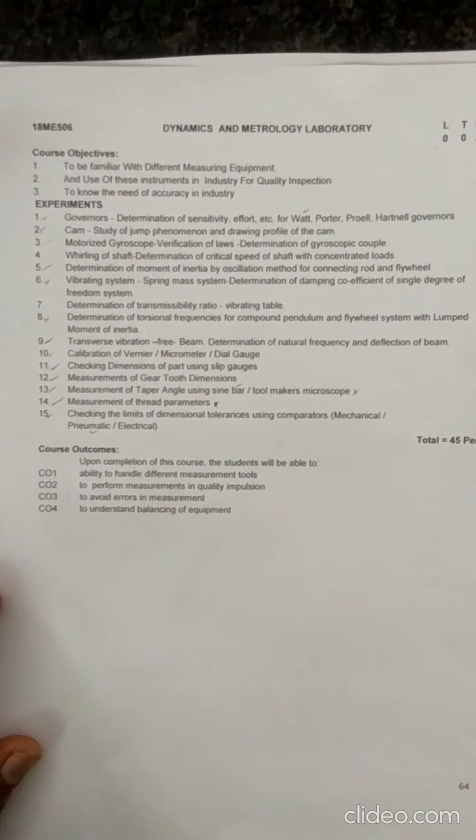18ME 506 Dynamics and Metrology Laboratory. Today I am going to discuss the exercises of the metrology lab, starting from the 11th exercise, checking dimension of parts using slip gauge.

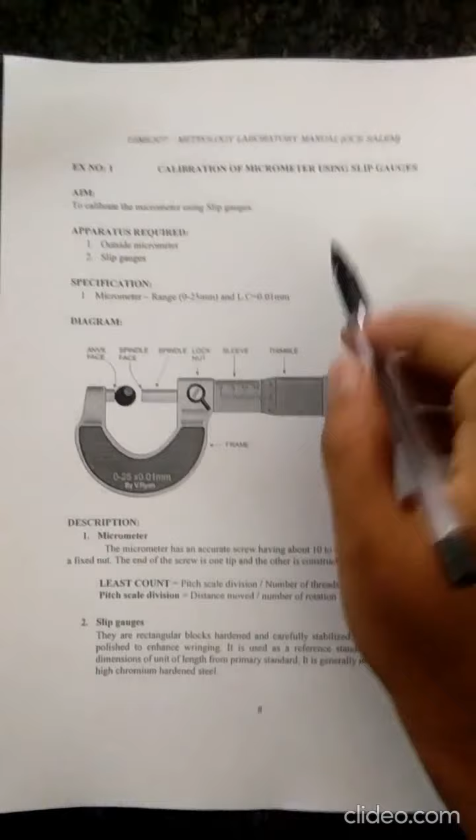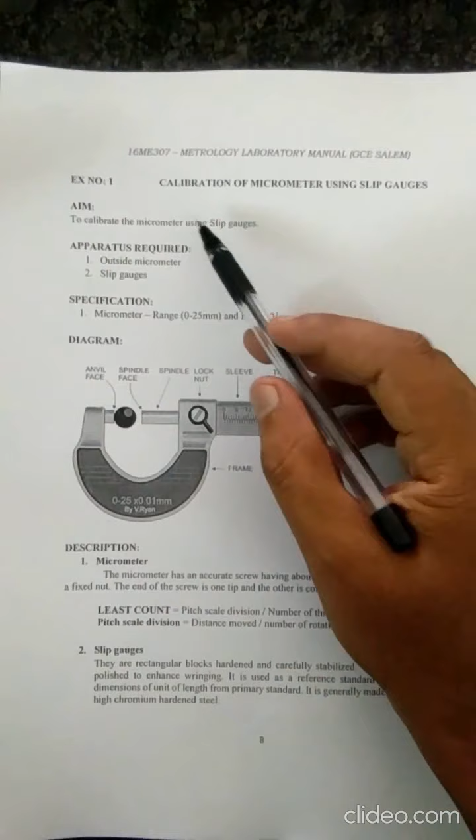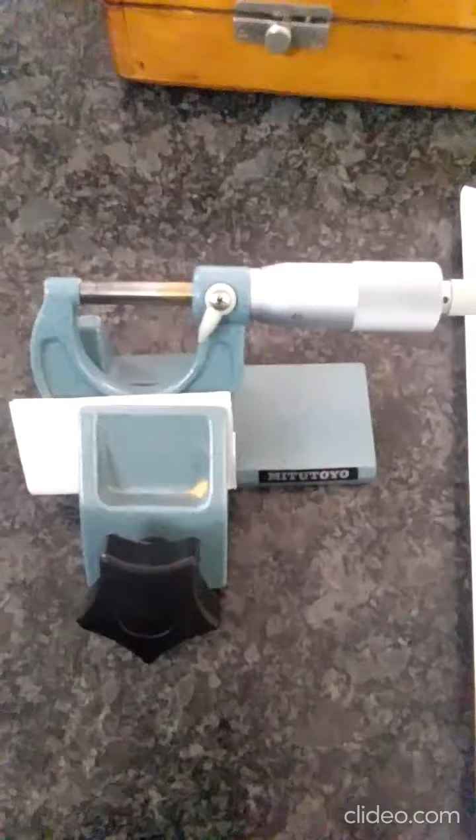The first exercise in the metrology lab is calibration of micrometer using slip gauge. The aim of the experiment is to calibrate the micrometer using slip gauge. The apparatus required are an outside micrometer and a slip gauge. This is the outside micrometer, and this is a slip gauge box. This one is a slip gauge.

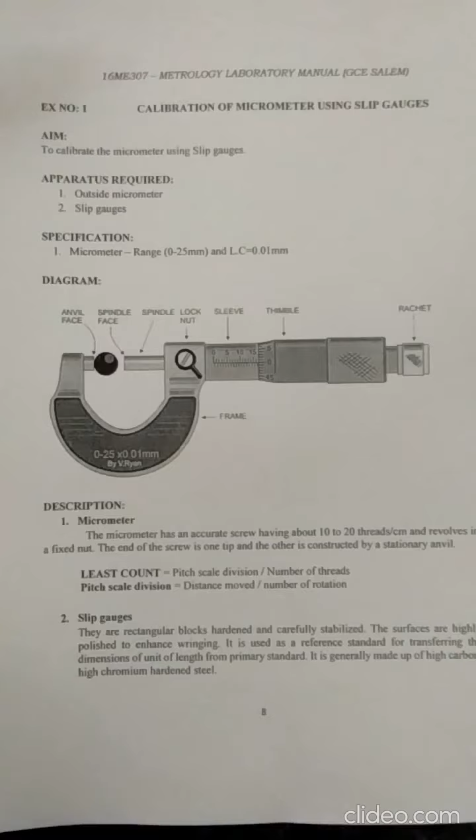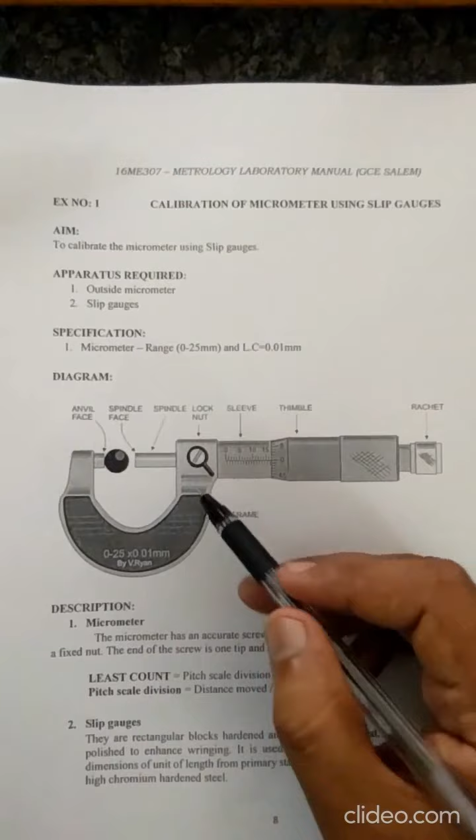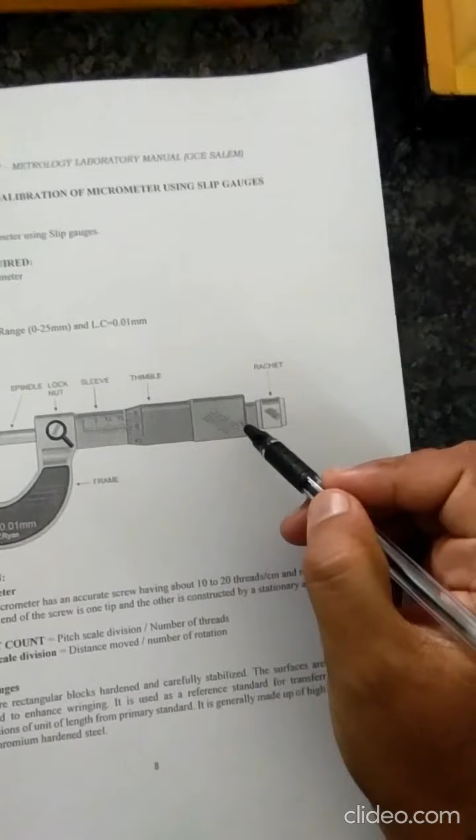A micrometer is used to measure the outer diameter of the job. There are different parts in the micrometer. First one is the anvil, this one is the spindle, and this is the locking nut. This is the sleeve, this is the thimble, the last one is the ratchet, and this one is the frame. In this real micrometer, this is a stand for fixing the micrometer.

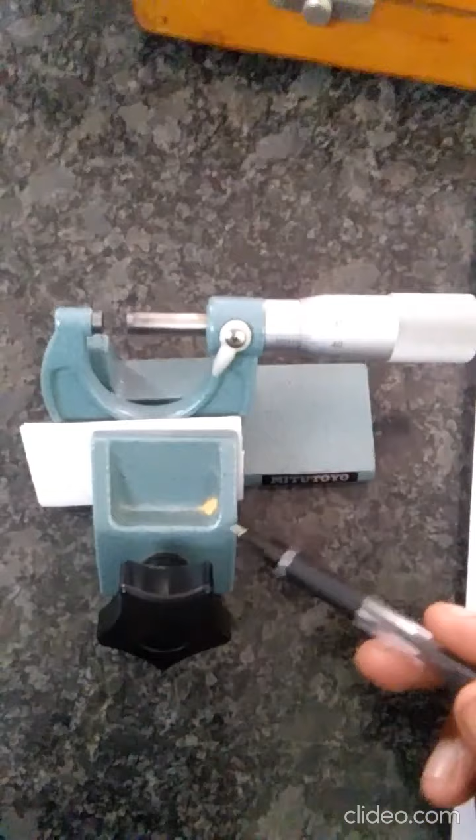This is a micrometer with a range of 0 to 25 mm. The least count of the micrometer is 0.01 mm. The parts of the micrometer: this one is the frame, this one is the anvil, this one is the spindle, this one is the locking nut, this one is the sleeve, this one is the thimble, and this one is the ratchet.

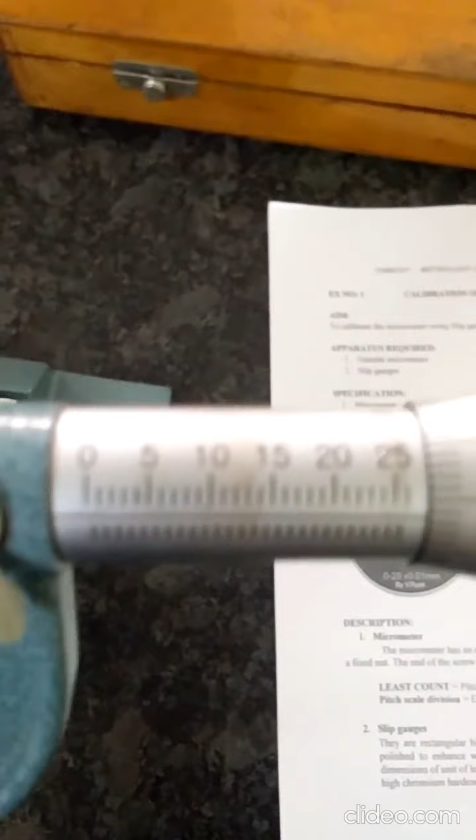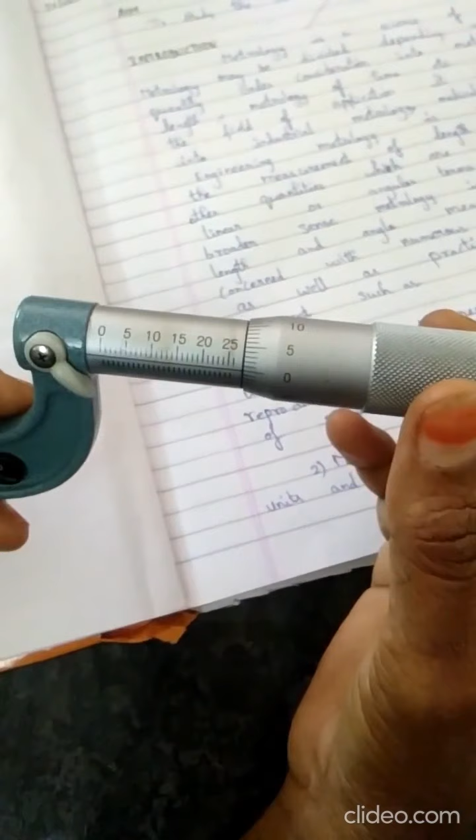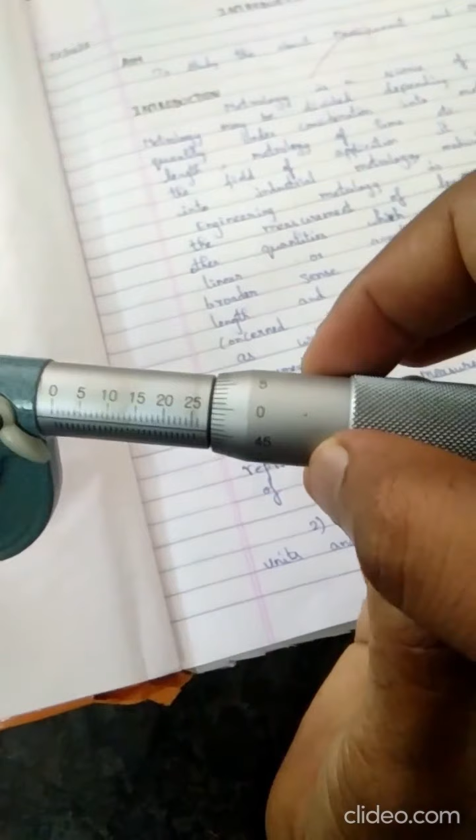The range is 0 to 25 mm. It starts from 0 and goes to 25 mm. This is the main scale reading. This is the thimble, and this is the thimble scale reading. In the thimble scale there are divisions of 0, 5, 10, 15, 20, 25, 30, 35, 40, 45, up to 50. The 0 counts as 50.

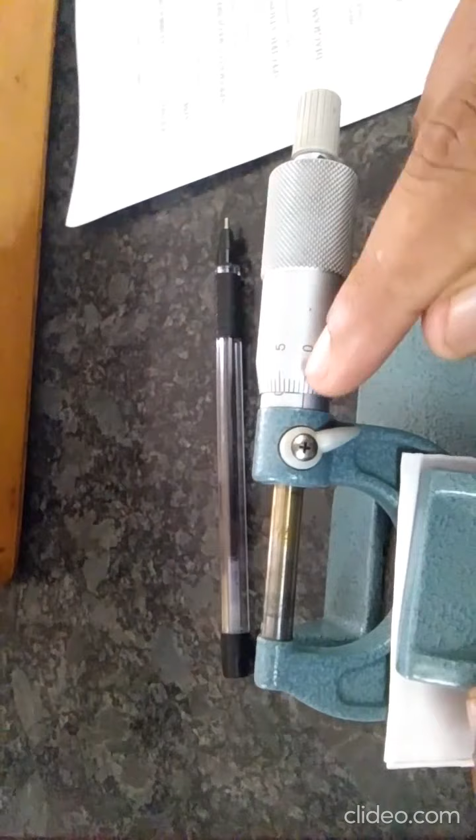In the main scale, starting from 0, it is divided in steps of 0.5 mm up to 25 mm. For one full revolution of the thimble, it moves 0.5 mm on the main scale. The thimble scale 0 and main scale 0 coincide at the starting point. When I revolve the thimble one rotation, 50 divisions, the main scale moves 0.5 mm.

For 2 revolutions, 100 divisions: first revolution 50 divisions, second revolution 50 divisions, total 100 divisions. In the main scale it shows 1 mm.

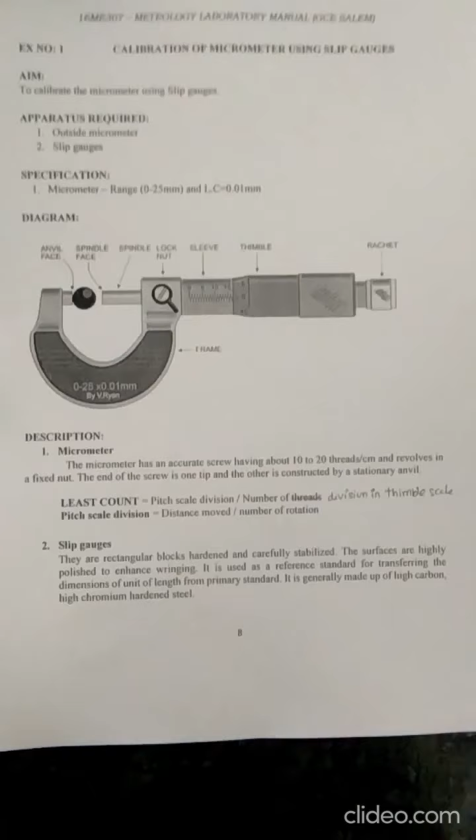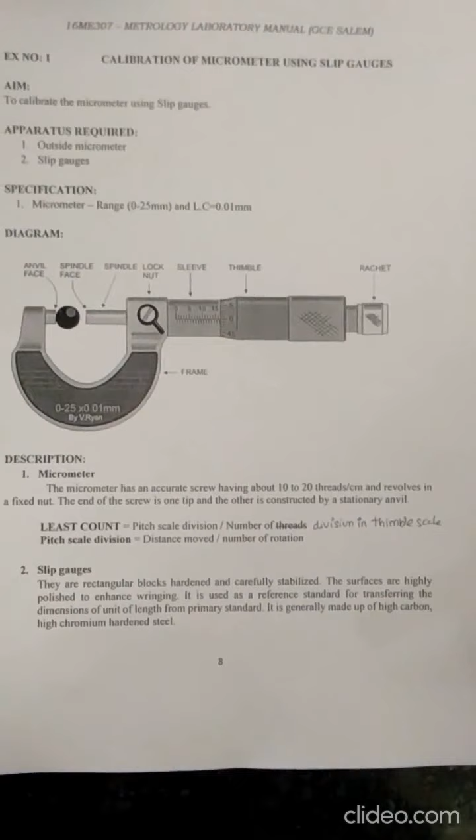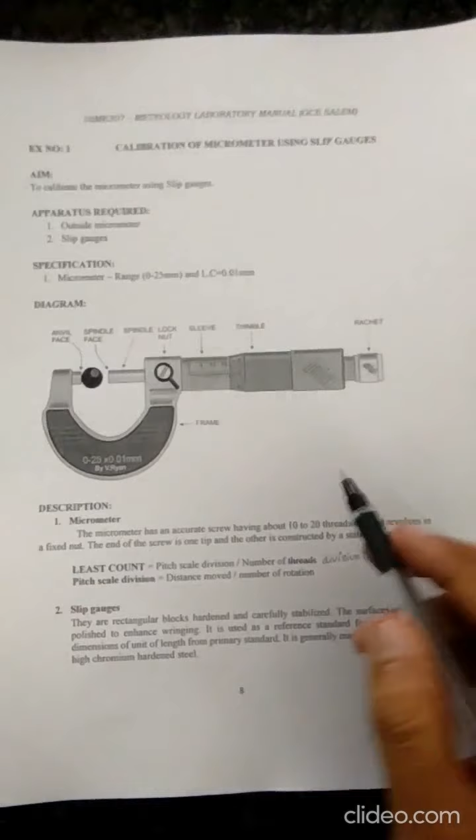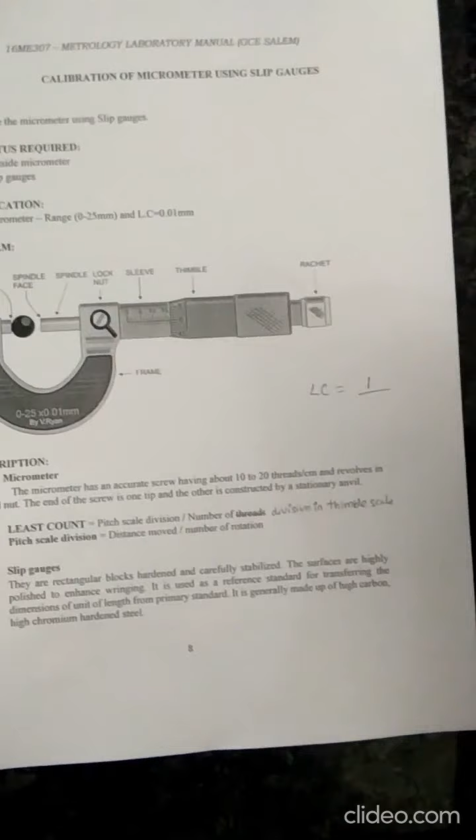Next, least count. Least count is the minimum measurement that can be made by a measuring device. The least count of a micrometer is pitch scale division divided by number of divisions in the thimble scale. For example, for one revolution the thimble scale division is 50, so for 2 revolutions it is 100, and the pitch scale division is 1. Therefore least count is 1 divided by 100, so the least count of the micrometer is 0.01 mm.

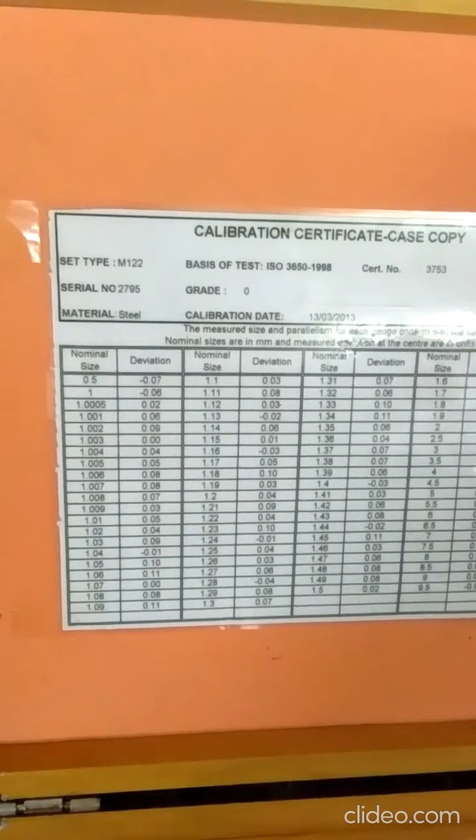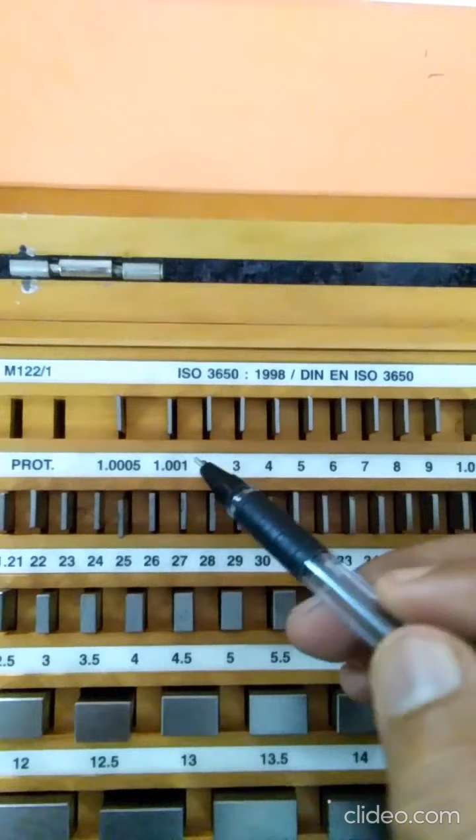Next, slip gauge. A slip gauge is a precision gauge block used as a measuring block. It is made of hardened alloy steel. This set type is M122, having 122 pieces in the slip gauge box. It starts from 1.0005, 1.001, 1.002, and ends at 100 mm.

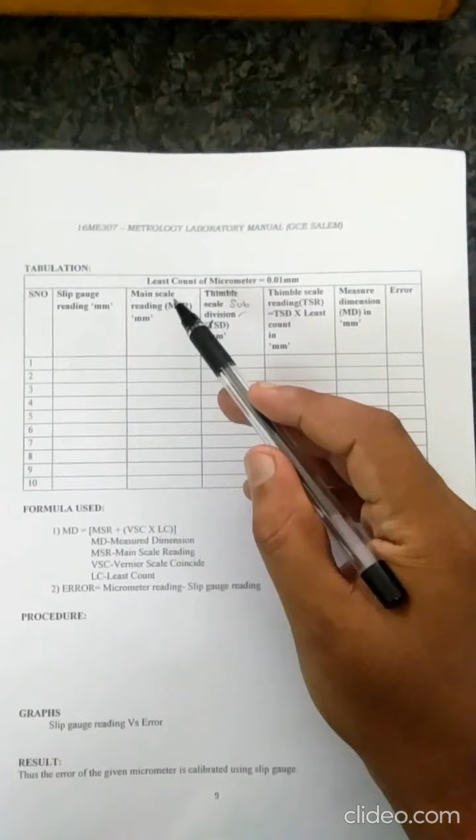Next, tabulation. In this tabulation, the first is slip gauge reading in mm. Next, micrometer reading: first note down the main scale reading MSR in mm, next the thimble scale division, next thimble scale reading, which is thimble scale division into least count in mm, and last, measured dimension MD in mm. The last column is error.

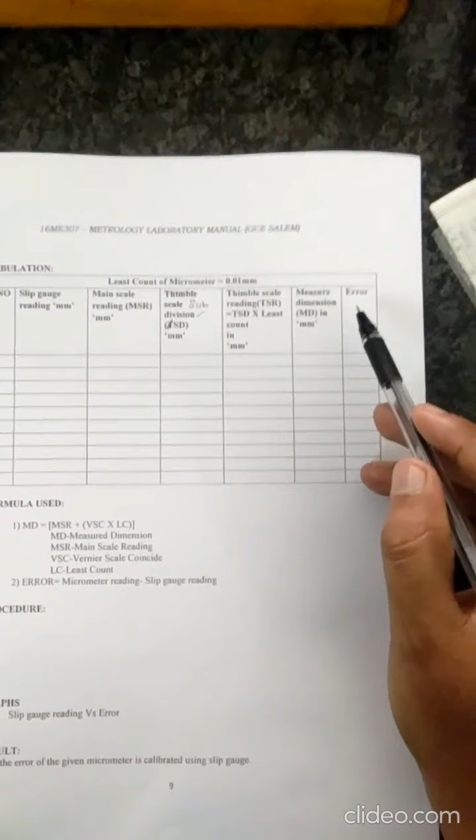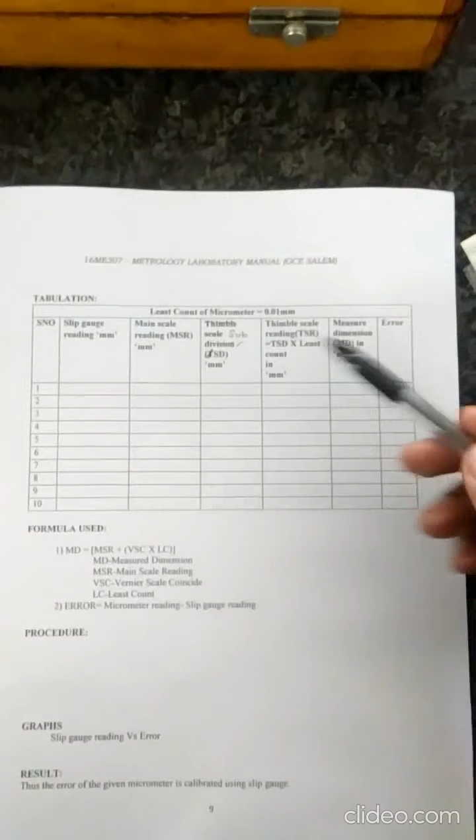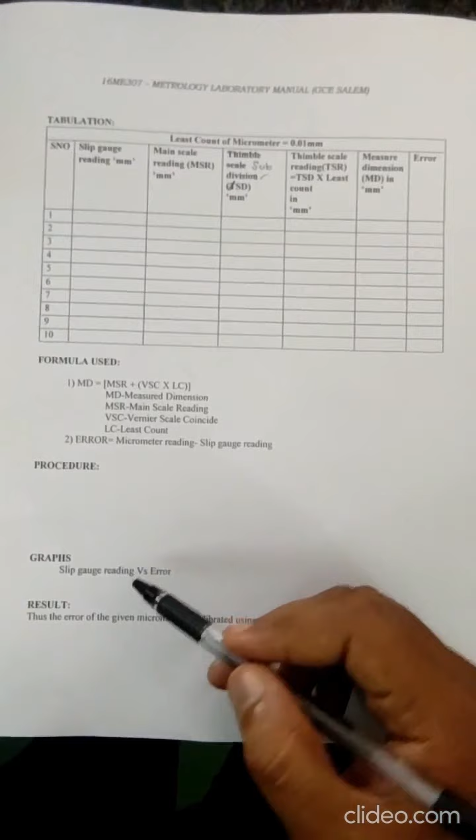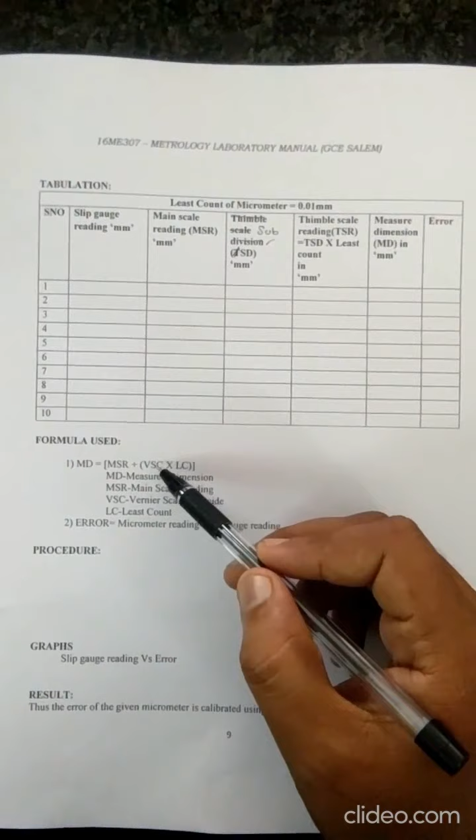Error is micrometer reading minus slip gauge reading. Taking the slip gauge reading and micrometer reading separately, the difference between them gives the error. Using this error, draw the graph of slip gauge reading versus error. The formula for MD is MD = MSR + VSC × LC, where MD is measured dimension, MSR is main scale reading, VSC is vernier scale coincidence, and LC is least count.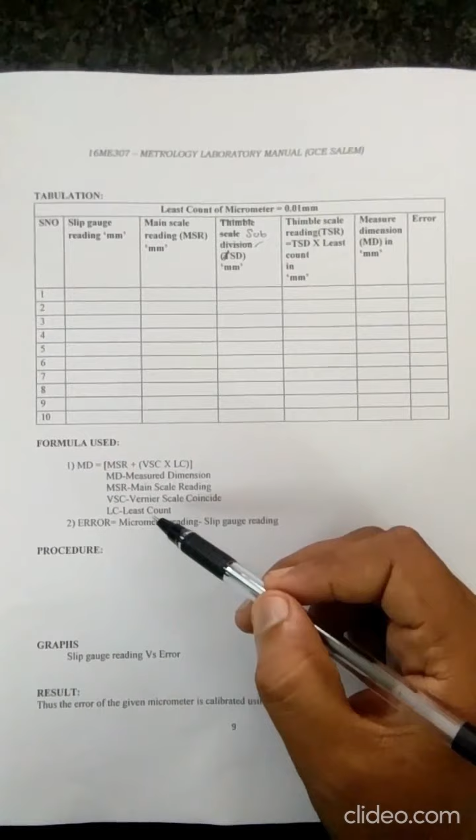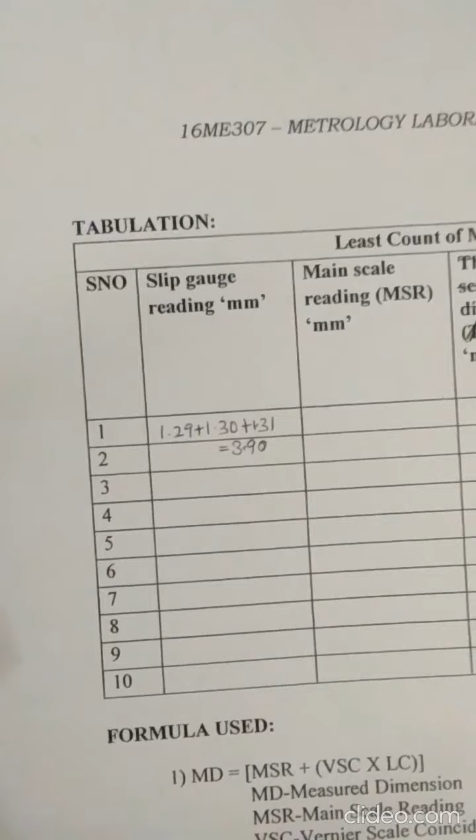Taking 3 slip gauges of various dimensions. The dimension is marked on the slip gauge: this one is 1.30, this one is 1.29, and this one is 1.31. This is the thickness of the slip gauge. So the first reading is 1.29, 1.30 and 1.31, and the sum of these readings is 3.90.

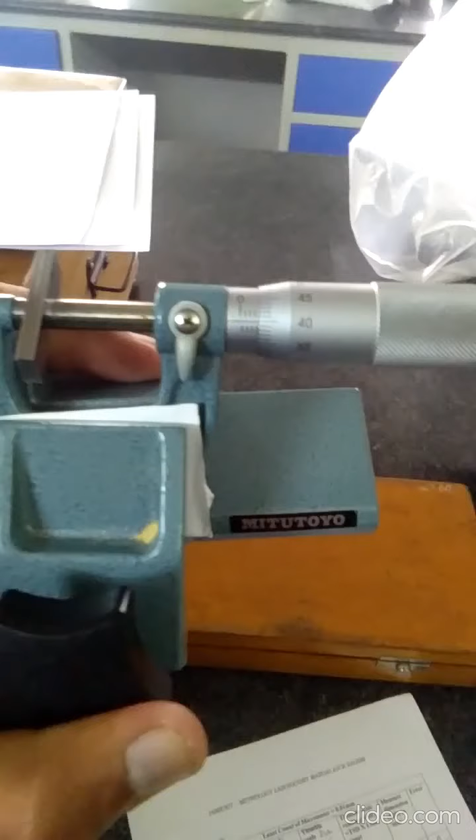Fix the slip gauges in the outside micrometer by rotating the thimble up to the ratchet. The ratchet is used for tightening on the slip gauge. The 3 slip gauges are fixed between the anvil and spindle. Note down the main scale reading and thimble scale reading. The main scale reading is 3.5: one, 2, 3, and below is 0.5, so totally 3.5.

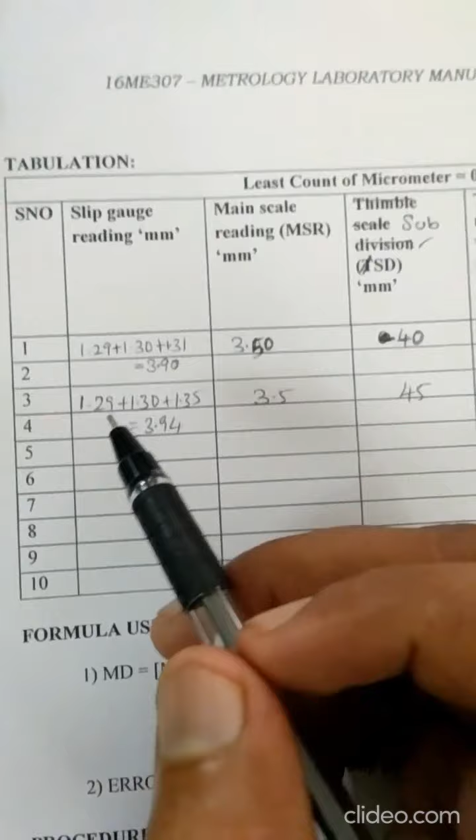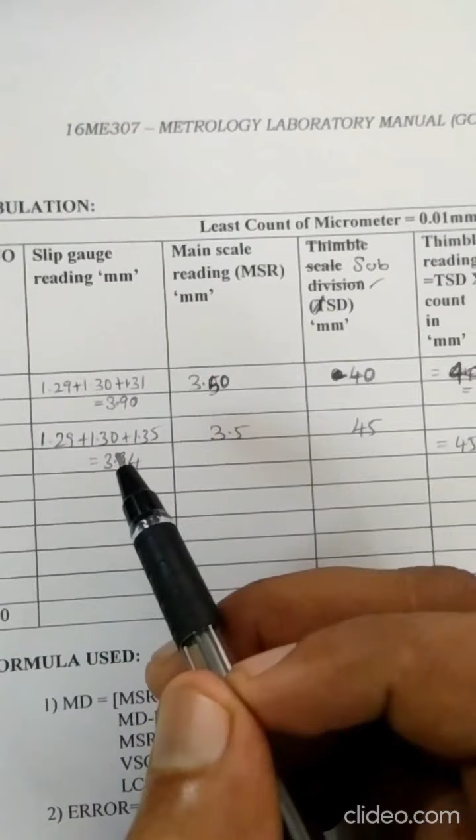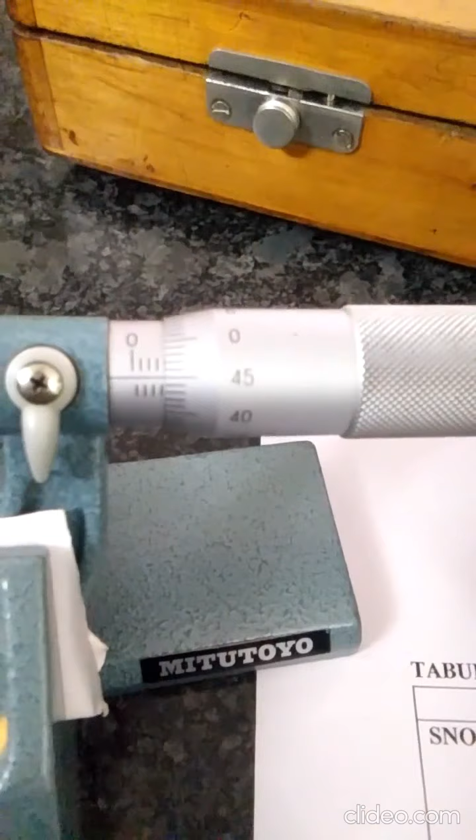The next reading uses different slip gauge dimensions, 1.29, 1.30 and 1.35. The total of these three slip gauge thicknesses is 3.94. I fixed the 3 slip gauges in the outside micrometer with the same procedure, tightened up to the ratchet. The main scale reading is 3.5: divisions 1, 2, 3 and this one at 0.5. The thimble scale reading is 45 divisions.

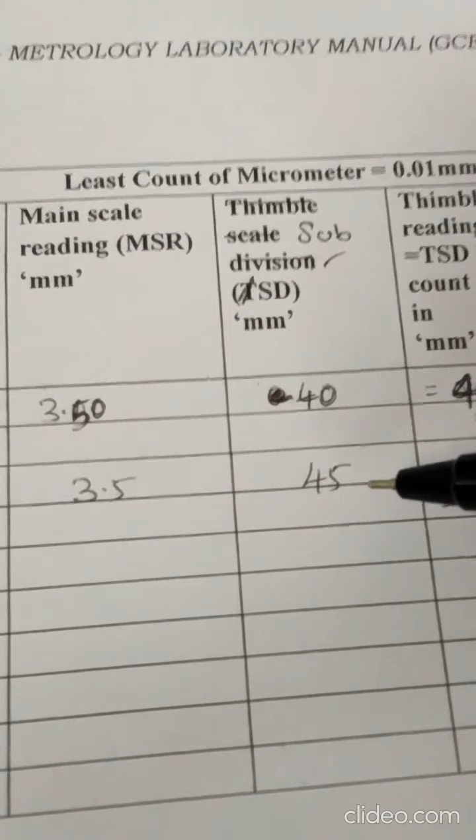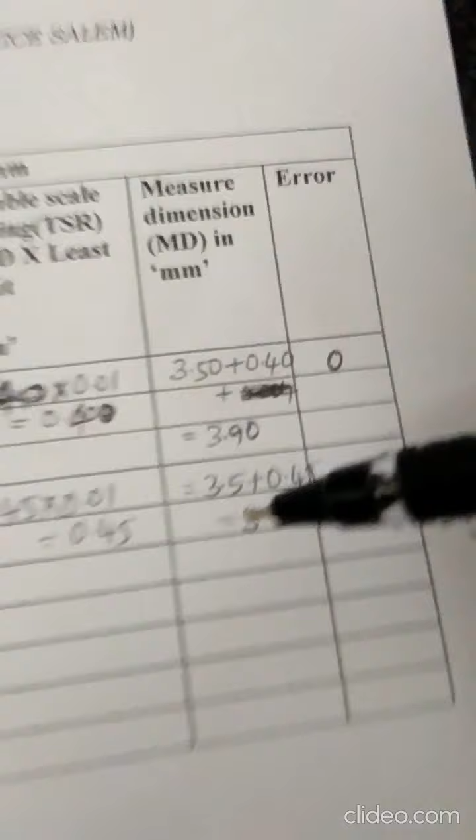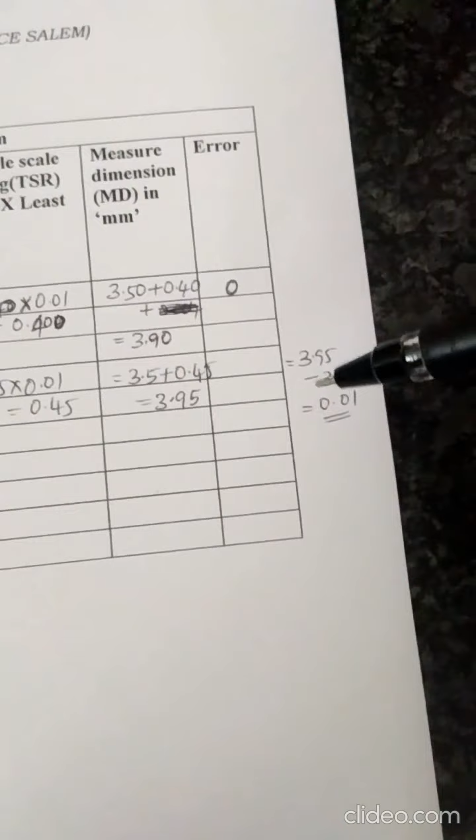Moving on to the tabulation. The main scale reading is 3.5 and thimble scale reading is 45 divisions. Thimble scale reading equals thimble scale division into least count, which is 0.45. So 3.5 plus 0.45 is 3.95. The error is micrometer reading minus slip gauge reading. Micrometer reading is 3.95 and slip gauge reading is 3.94, so the error is plus 0.01.

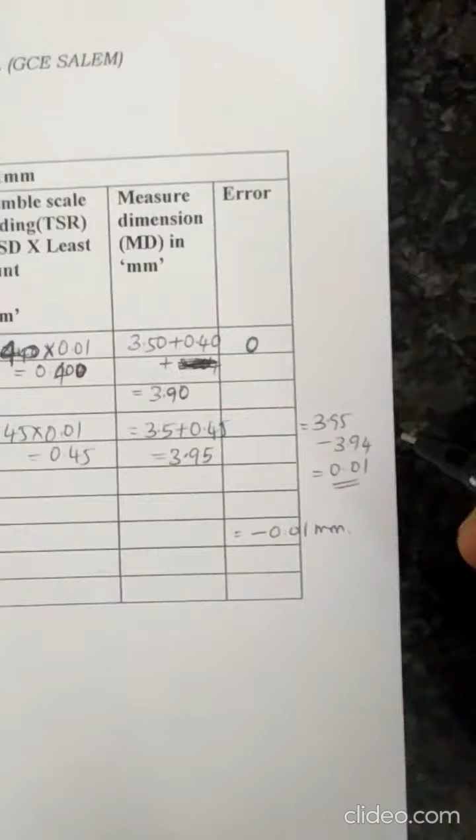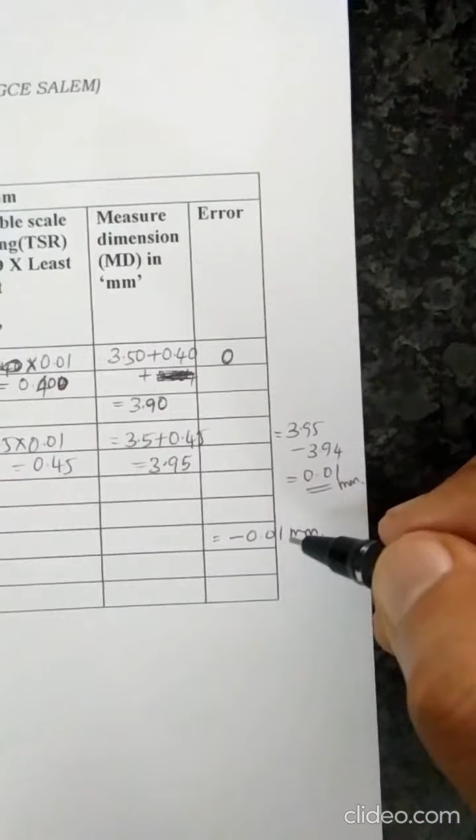So plus 0.01 mm. Sometimes a minus reading is also noted; minus 0.01 readings are also possible. Then plot the graph of slip gauge reading versus error. Finally, the result is that the error of the given micrometer is calibrated using slip gauge.